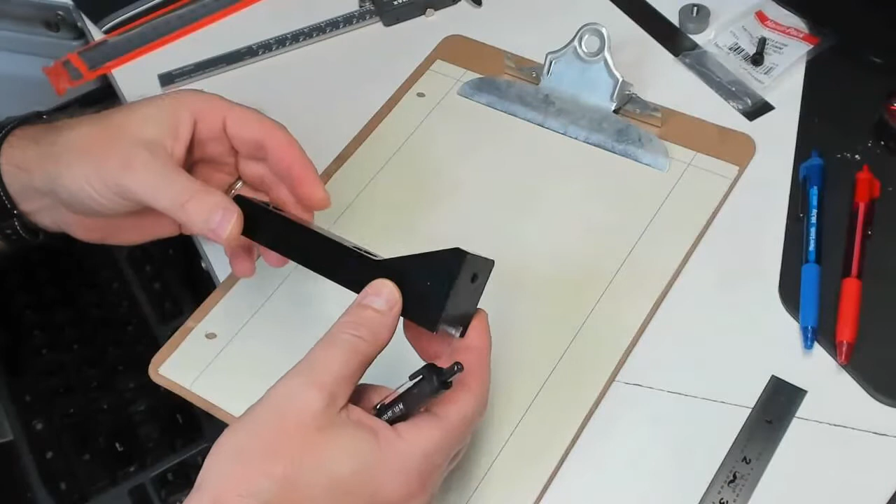I actually pulled this off an old CNC type machine. It was a little bumper that stopped one of the axes from slamming into a piece of metal, and this is on one of the rails. But always just look at your piece.

When you do a sketch, you don't really need that much detail, and it doesn't have to be that accurate. Using graph paper, this engineering calc paper helps—you can use the squares to get it more accurate. But the whole concept is to get the general shape, and then when you take measurements, you add in all the measurements you need.

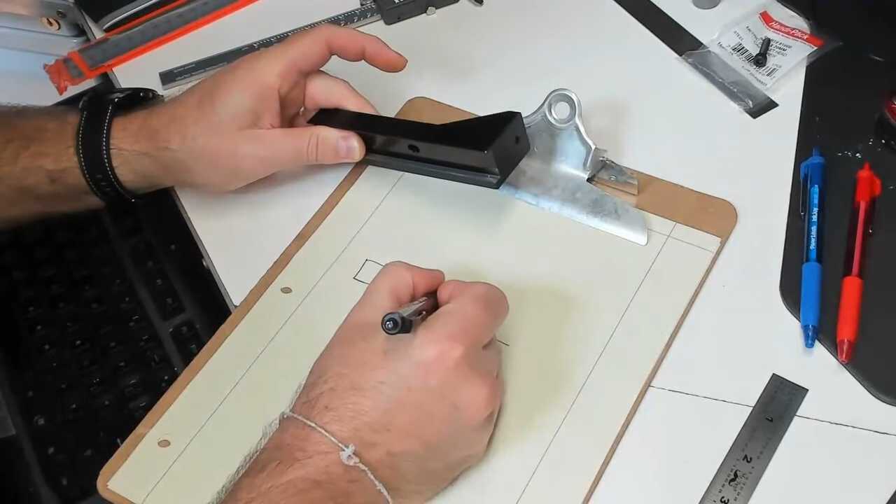So first, let's do the front. Technically I could just trace this, but I want to do it a little smaller. So I make the bottom about yay length. Come up 3. Come over—actually comes over pretty far, and then it curves up. Then curves out, then comes down straight.

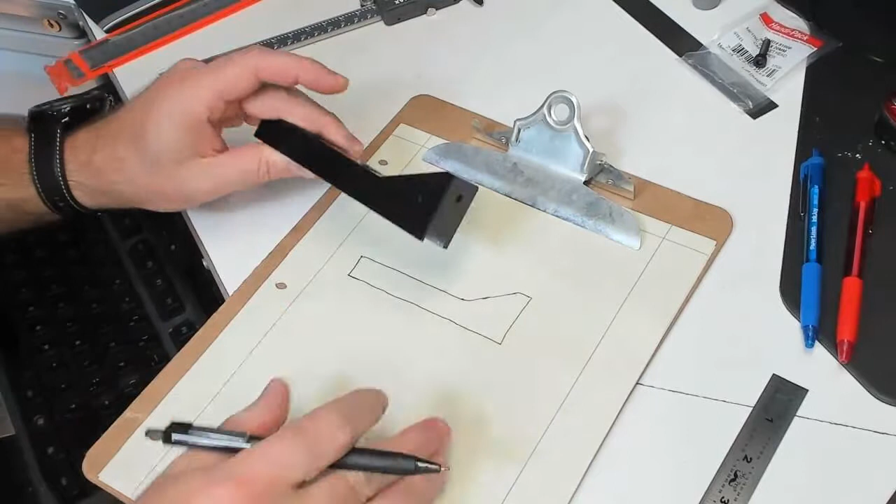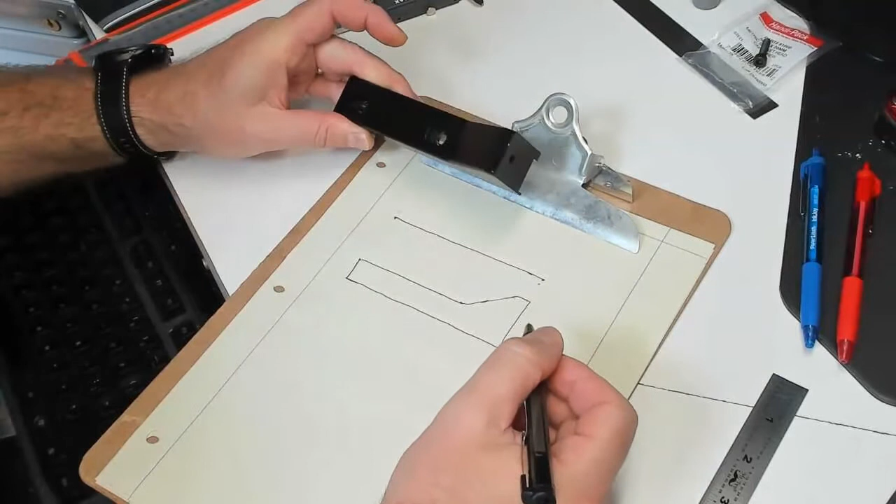Simple. Let's do the top. Top's just going to be a rectangle. Always leave enough room so you can take dimensions in between. So this one I'm just going to trace straight up, let's see, right about here—yeah, that's good enough—straight across, it's going to end right about there. You see, width-wise from height to width, it's a little wider than it is high. So if I did 3, I could do 4. Yeah, 4 is good enough. Doesn't have to be exactly to scale.

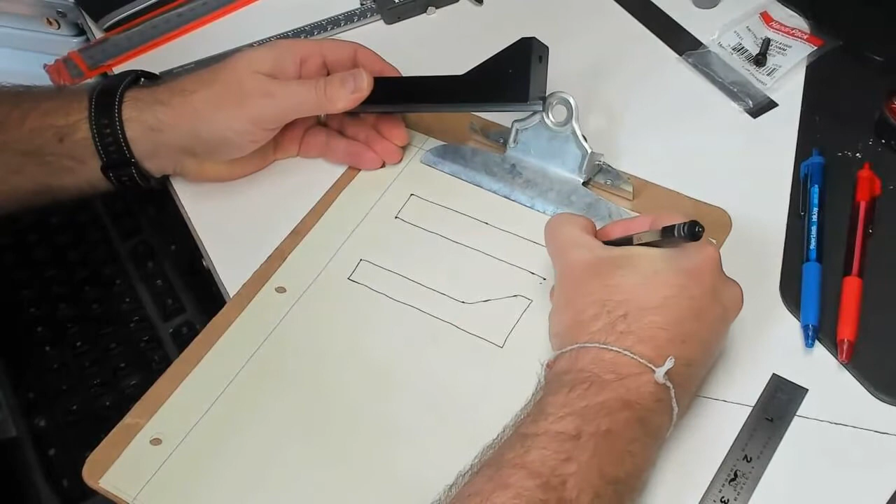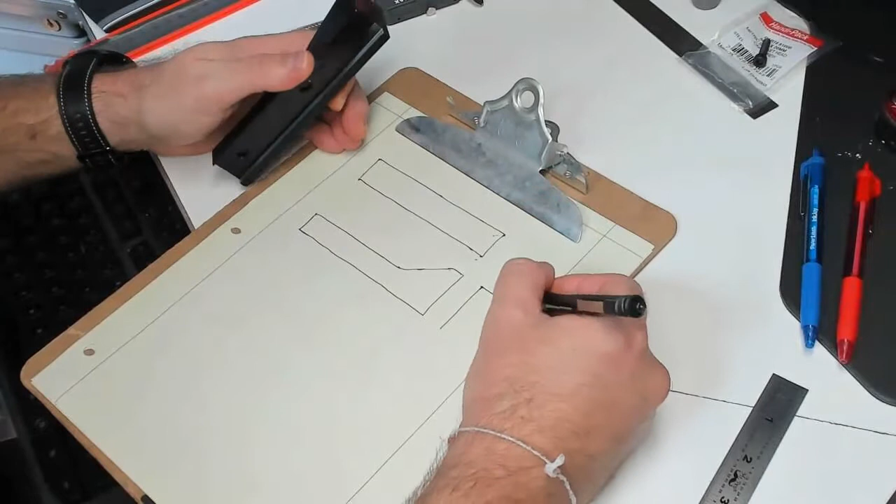That pen's really leaky. Let's do the right side. The right side has a thread hole for a screw to go in. It's pretty much rectangular except for the bottom. So it's the same, so it's 4 wide—because this is the width, that's the same width, 1, 2, 3, 4. Come down. Now on the bottom, on the right side, it's thicker—it's basically a slot that goes down the middle. So the right side's a thick edge, left side's thin.

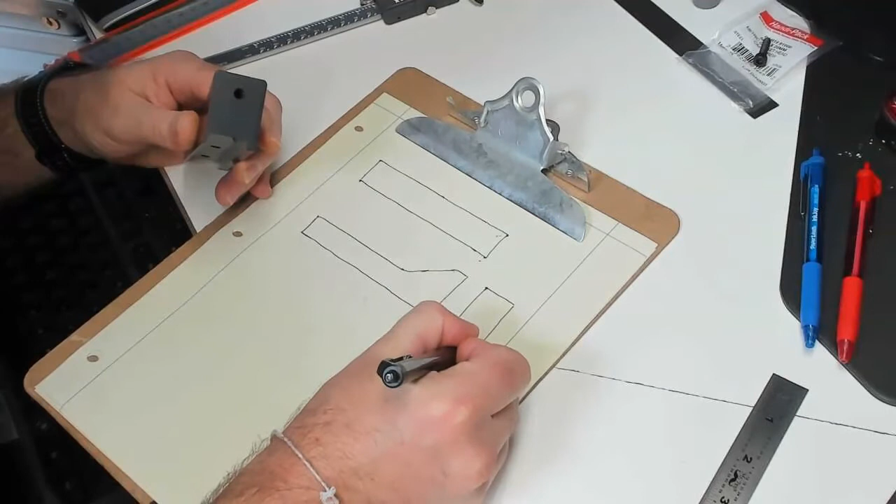So I'm just going to go up 1, over, thicker. And then the tapped hole looks centered, about yay. There you go—a simple sketch so far.

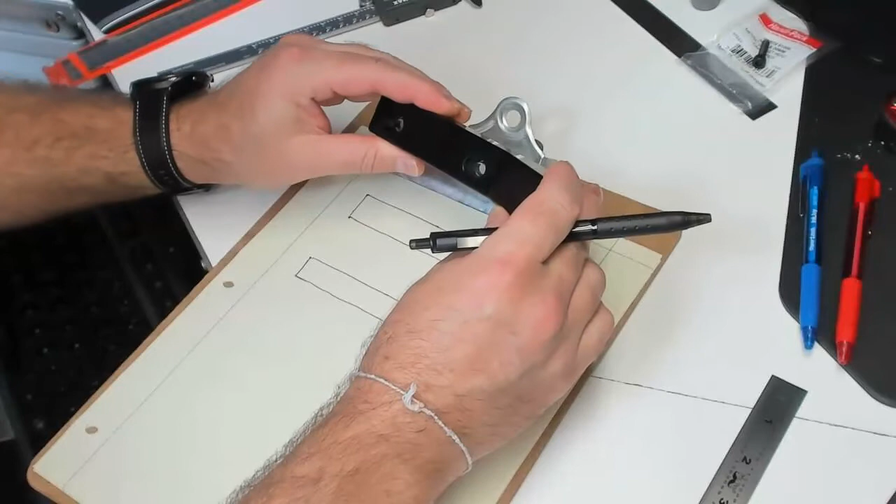Now let's add in these. I got the basic outline. Let's add in the other part that's missing, which is these 2 slots. Technically there's going to be a line here and here just to represent where it transitions. I'm just going to add those in lightly so I know what they are.

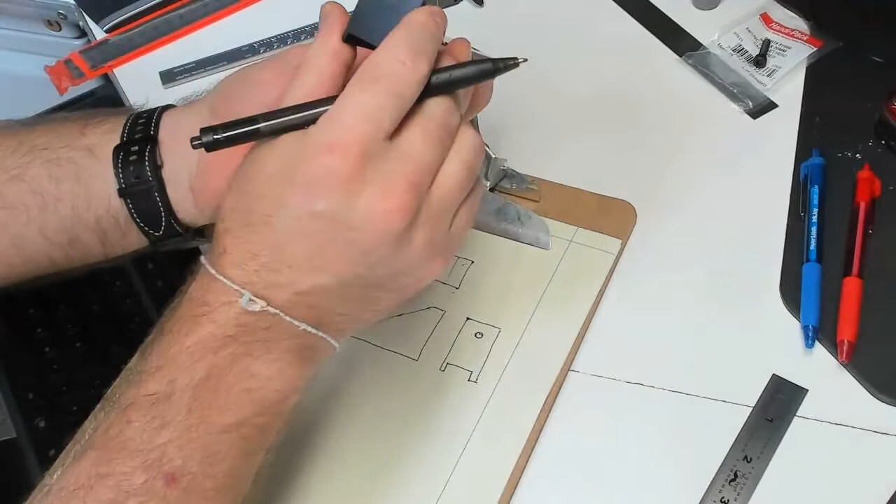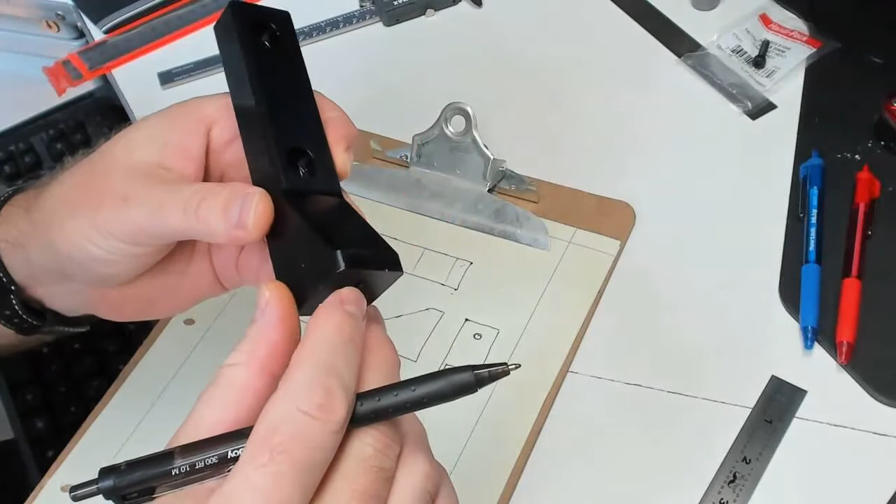And actually, on the front, if you look up close, it's actually rounded edges—so rounded, all around. Only parts of the bottom are flat—all the inside cuts are extremely flat, and the very front is flat. And it seems like this little curve right here doesn't have any round to it, a fillet, but everything else has fillets. Maybe I want to accentuate that a little bit in the drawing.

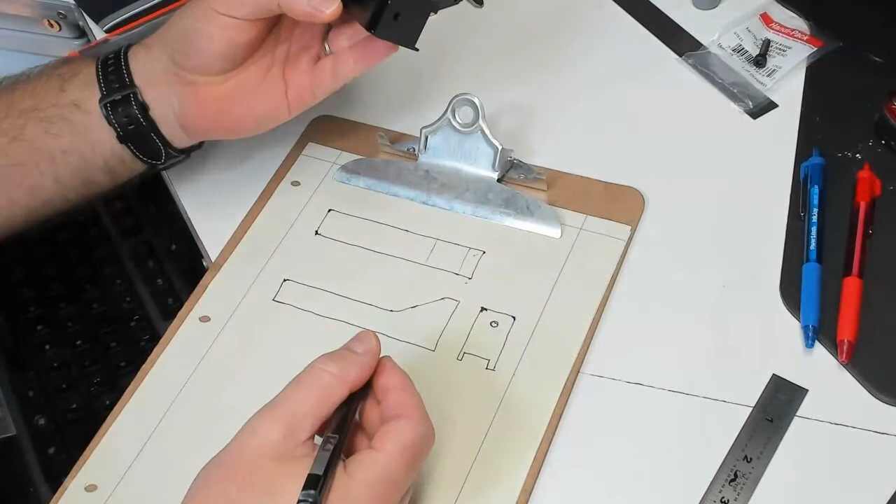Curves—I'm looking from the top. Curve. Curve. There, I have it. Doesn't have to be pretty.

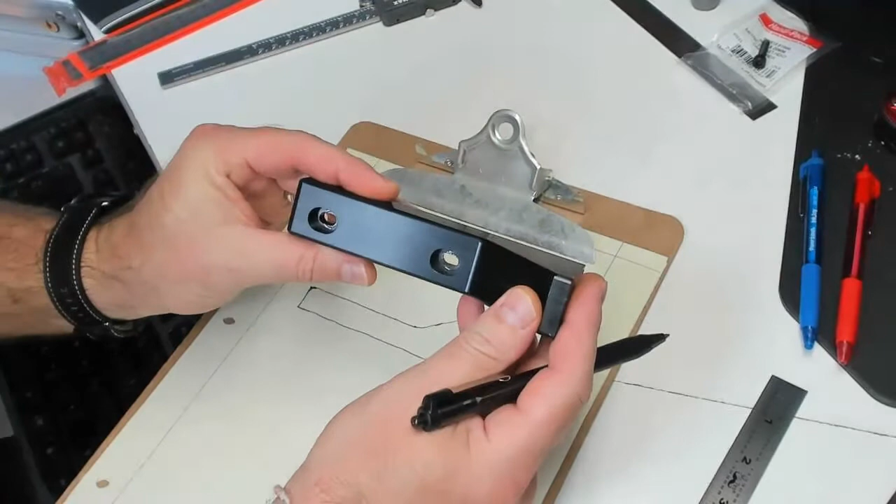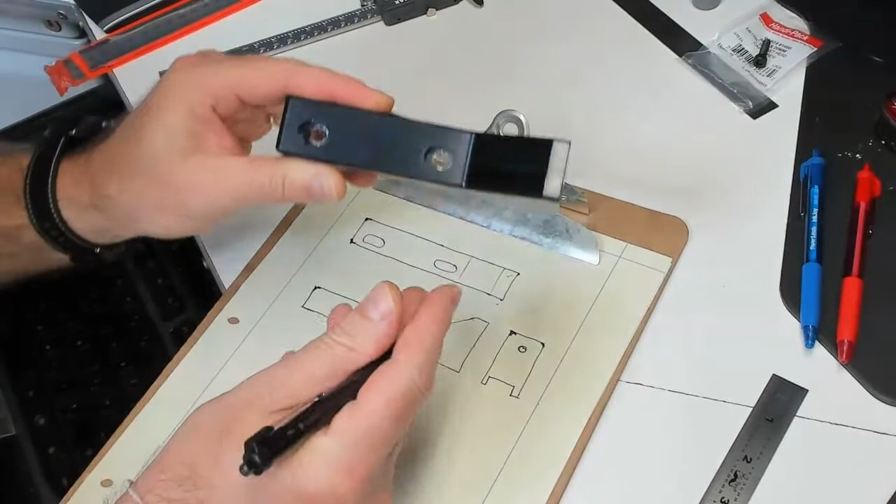Now these two slots are actually offset a little bit, not right on the center line—looking straight down from the top, it's slightly to the right side. Okay, flip it this way, right side. So, slot, and then there's other slots inside the slots, the through slots. Doesn't have to be accurate, just has to represent. Now that is a simple sketch of this little part here.